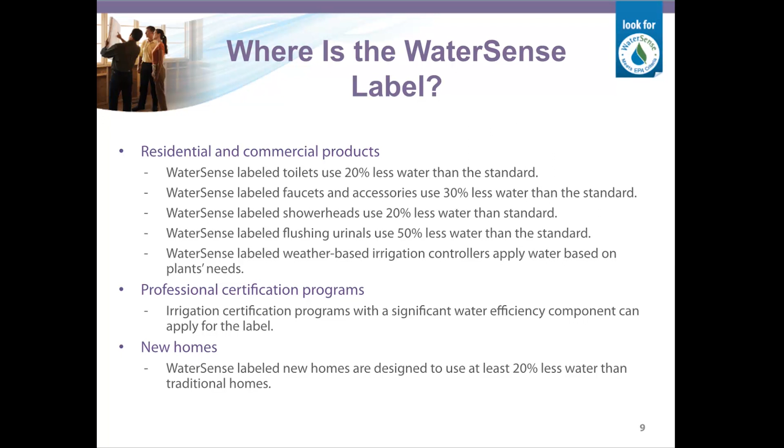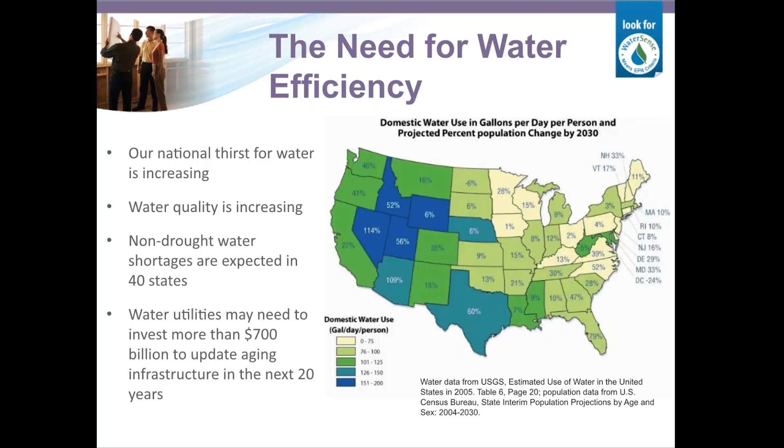As a sense of introduction, I wanted to showcase this map of the country, which essentially shows the population growth expected for 2030. As you see in this key, most of the country is going to be experiencing growth until then, and therefore there'll be more demand on our water system and our infrastructure. Unfortunately, there hasn't been that much investment in our actual infrastructure, and so we know that water efficiency is going to be one of the primary points for many jurisdictions as we move forward. We also expect that many of our states will experience shortages that are non-drought related. So installing, building, and designing homes to be water efficient is a proactive way to minimize the impact of that type of growth.

Another thing we like to do in terms of homes and promoting our program is making the link between energy and water and what that means for efficiency as a whole and sustainability. We really just want the public to understand that it's not just about water. Electricity and energy have a lot to do with how we get our water, where it comes from, the way that it's treated, delivered, and essentially taken off our lots. We like to make that link, especially because we realize that the energy industry is a very important one, and there are a lot of financial resources given to the energy industry that may lack in the water industry. So leveraging that and making that link has become a really important part for us.

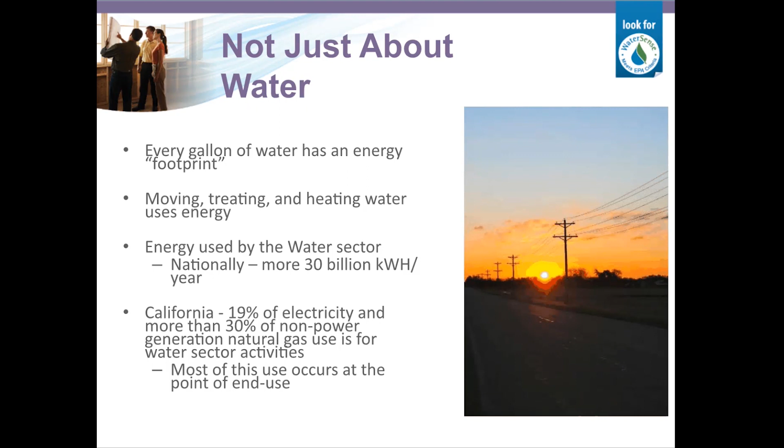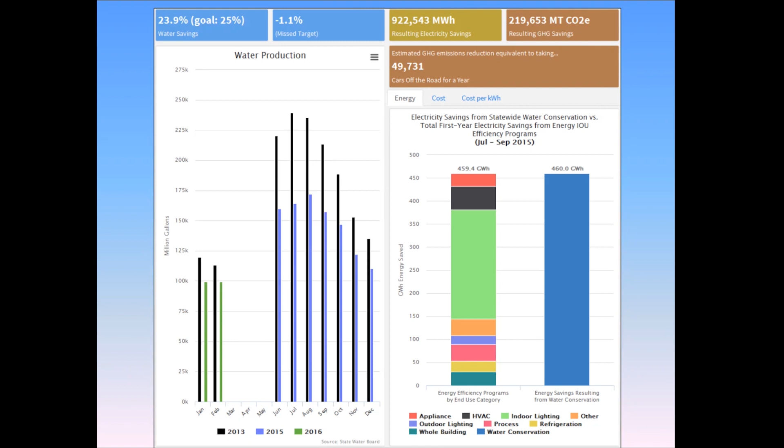And we see building codes in jurisdictions such as California and also in Denver that are adopting some more stringent water efficiency codes, and that have included some of WaterSense's guidelines into their own plumbing code.

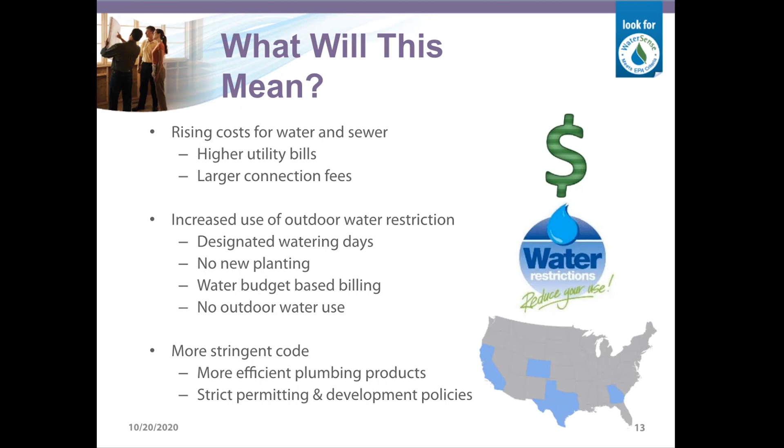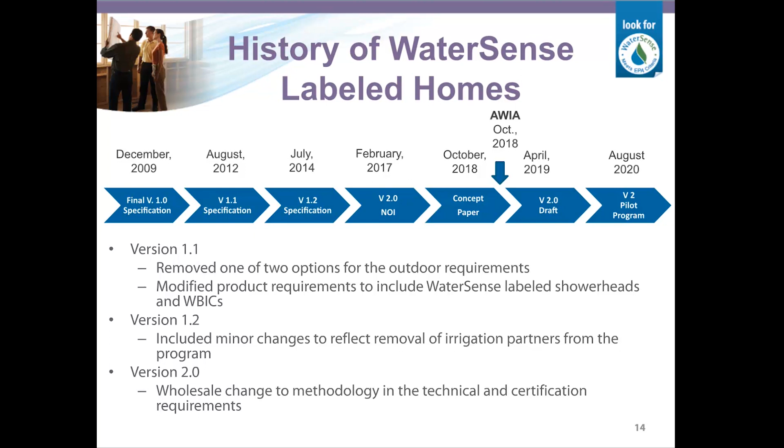And then the final draft of version 2.0 was published in 2019. And just now, as we speak, we are starting to roll out a pilot program of version 2.0, which we'll talk about a little bit towards the end.

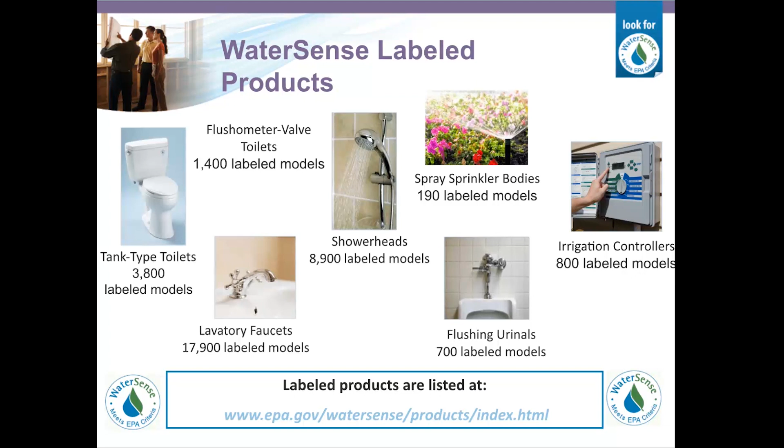Then we move into the WaterSense labeled homes. The criteria for obtaining the label on homes is any single family house or townhouse, and also residential units in multifamily buildings that are 3 stories or less. The caveat with multifamily is that we require that each unit is certified rather than the entire building. So we look at each unit to make sure that each one is meeting each requirement.

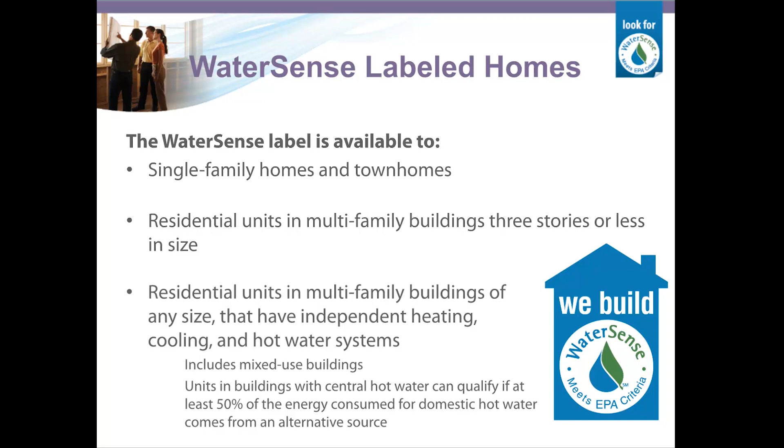So why build WaterSense labeled homes? Well, we found as the program has evolved, starting with products, that it was important to not only offer product solutions at the endpoint or user level, but also to make it a whole house building science approach, looking at how water is distributed through the home and how that distribution system impacts both the performance and life of these products.

Naturally, convenience, efficiency, and confidence that a homeowner who has a WaterSense labeled home is assured that their home is more efficient than the standard, and that they are having an impact on water use. One of the bigger points is outdoor water use, so there are requirements in our certification that provide guidance on the type of irrigation and landscaping used.

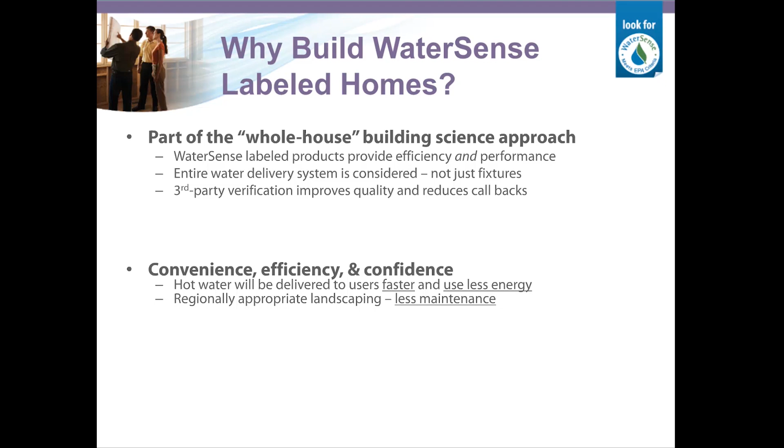And then there's the ability to co-brand with WaterSense. There are other partner or sister programs we have with EPA, or other regional green building products or certification programs. Those tend to align really well with WaterSense requirements, allowing our certification to be seamless when builders are working toward any other green or sustainable certification.

So now we're going to jump into a little more detail about what the requirements are and what that looks like for a home builder.

These are the various components of a WaterSense labeled home. We start with WaterSense labeled products, which are required in every home certified by WaterSense. That's because these products have already gone through testing and certification, so we're sure that by just installing WaterSense labeled products, we know they're going to perform well and be at least 20% more efficient than any standard product.

Then we look at hot water distribution. One of our requirements is that hot water is delivered to the tap in a more efficient and timely fashion than in a standard home. We have requirements for timing and the amount of water that can be flushed out before you see a 10-degree temperature difference.

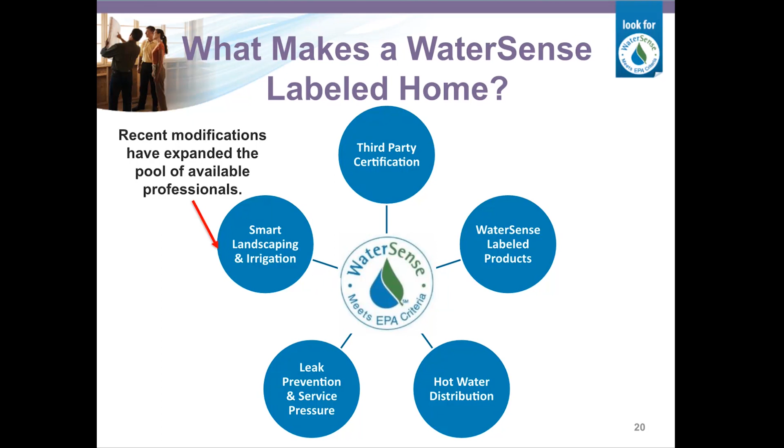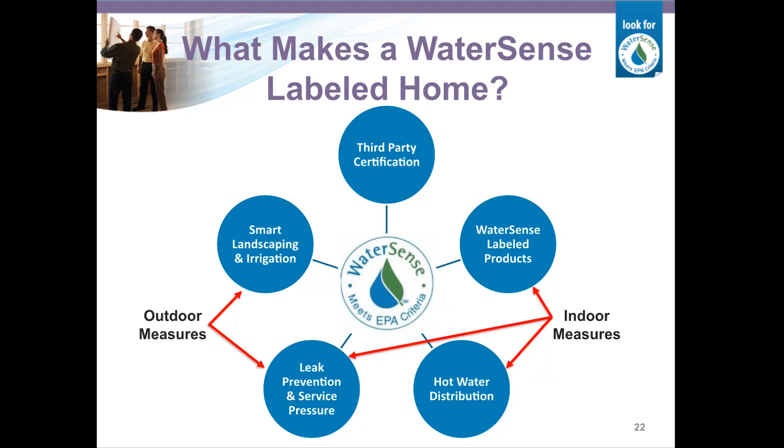So we've had some modifications to our outdoor requirements, which we'll discuss in more detail. These three components make up most of our indoor requirements, and leak and service pressure obviously also affect the outdoors as well as landscaping. And of course, we always work together with our sister programs, Energy Star, also under EPA, as well as the folks at Indoor Air Plus, also at EPA.

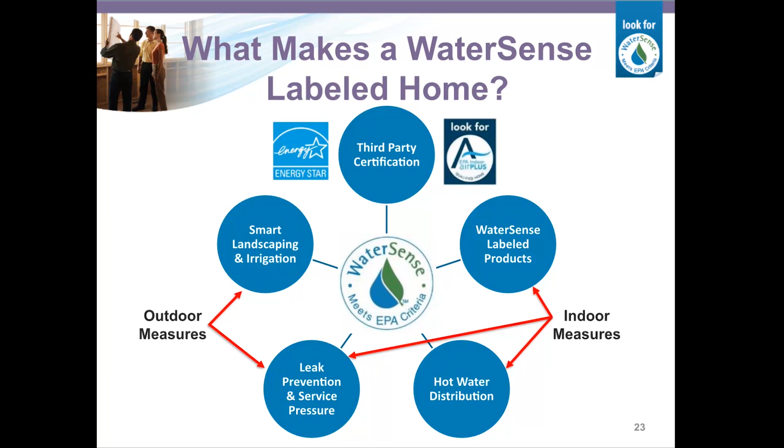So this is what our checklist looks like, and I apologize if it's not very readable. You can always go to our website, and I'll make a note of providing a link in the chat here at the end. This is essentially a step by step of all the requirements for certification.

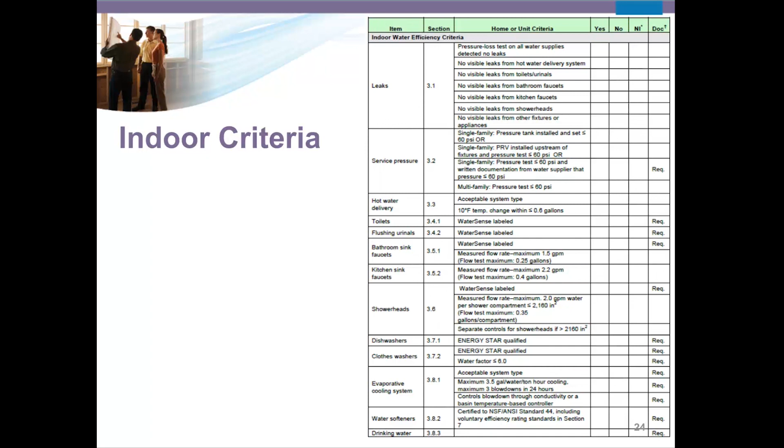Some of the simple things we're going to look at, what we call air quotes low-hanging fruit: leaks. If we're dealing with new construction, these should be relatively simple to identify. So we expect to see no leaks and no loss in pressure throughout the home.

Other low-hanging fruit are WaterSense labeled products: toilets, faucets, shower heads, all should be WaterSense labeled, as well as any irrigation systems that may be installed. And then, of course, dishwashers and clothes washers that are Energy Star certified and meet the water factor requirements, which we'll go into more detail on.

So those are all relatively easy. These are things that can be bought right off the shelf and installed, and there really is no more effort needed into complying with these.

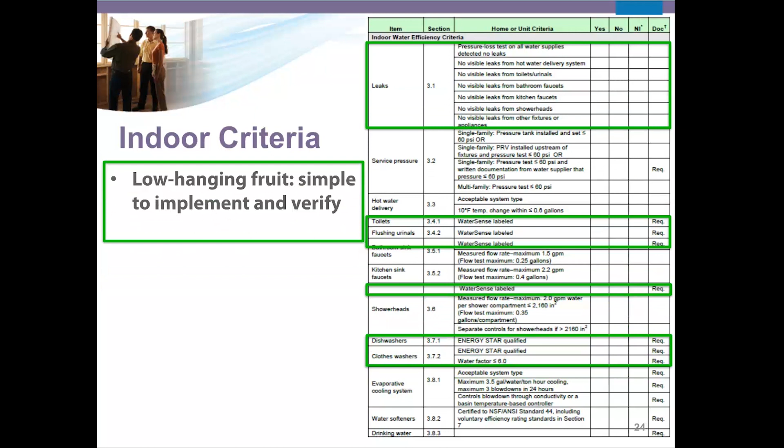Then we have items that perhaps require a little bit more effort in terms of documentation or verification. So our service pressure, the fact that you have to go out there and look at the water line and take a gauge to it, and just verify that the pressure is not anything higher than 60 psi.

Then in terms of the products, we do ask that you provide documentation of the models that have been installed and just verification that they are WaterSense labeled. A lot of the time we find that verifiers come across the fact that documentation or manuals have not been saved.

So you can always go to our website to confirm whether a model has been labeled. If it's not on our website, which is not updated live but rather every 3 months or so, you can always email us directly and we can certainly verify that for you. And then systems that are a little bit more complex, such as evaporative systems, water softeners, or drinking water systems, can also require a little bit more.

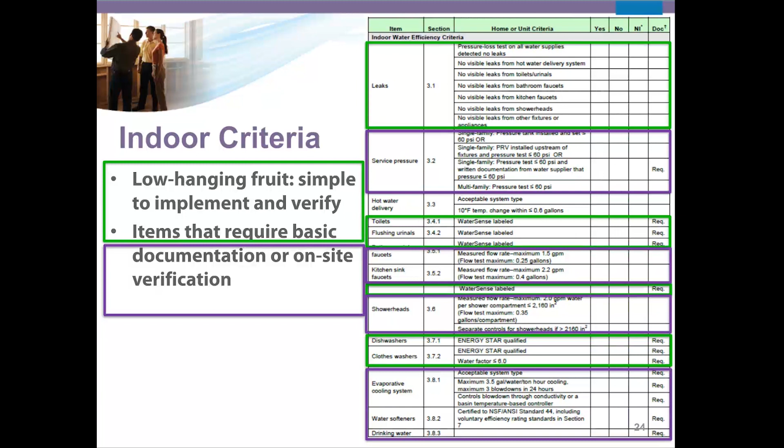Okay, and then this third one is our hot water delivery system. This one tends to be a little bit more challenging, given the nature of and the need for it to be designed and also built to spec, and requires a little bit more inclusion of different teams, as well as the plumbing technicians to be on board.

So this one can get a little bit tricky, but we have found that builders who start to get acquainted with the program, after their first few homes, and if they really bring their plumbing staff and their plumbing subcontractors on board, it could be something that is very successful and can really have a great impact on the home.

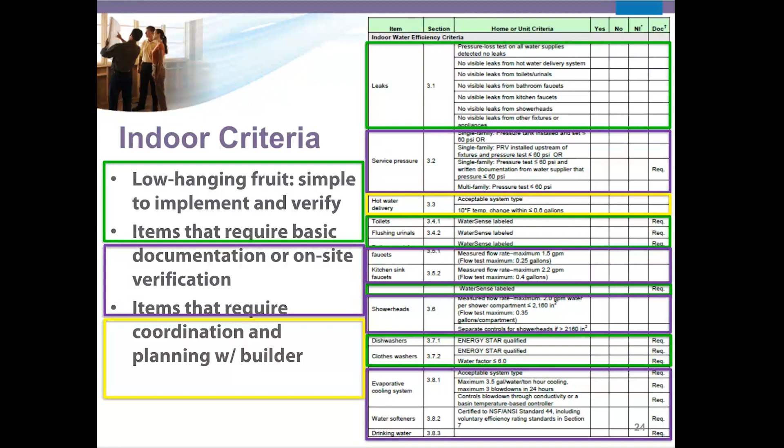Okay, so we've talked a little bit more about this. I won't go into detail because I know we're probably running a little bit out of time, and I did want to get a little bit into version 2.0. So again, this is just low-hanging fruit, a little bit more detail on how that's acquired.

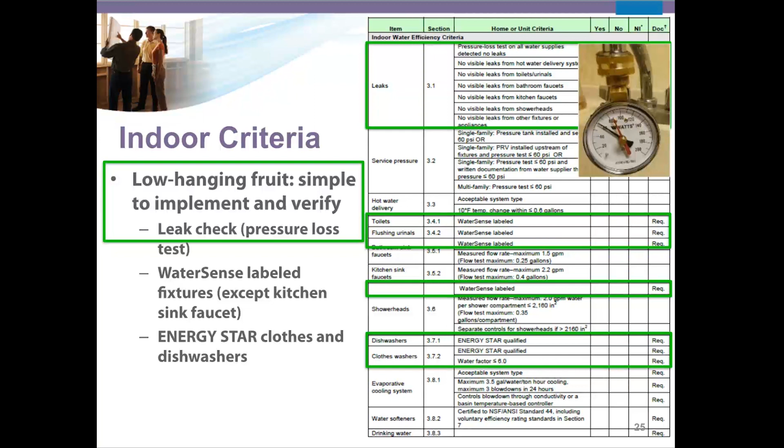I had mentioned the water factor earlier, and that was in regards to any appliances that are Energy Star certified. So what we're looking for is essentially at what ratio the water factor shows the ratio of gallons per cycle being used versus the cubic feet, or the volume, of the appliance itself.

So if you look at this example, if a clothes washer uses 30 gallons per cycle and has a tub volume of 3.0 cubic feet, then the water factor is 10. We set these water factors essentially because they are significant as to how much water the appliance is saving.

So even though these appliances are not WaterSense labeled, there is a measure in order for them to be energy efficient, they also have to be water efficient in order to achieve that. So that's why we look at the water factor.

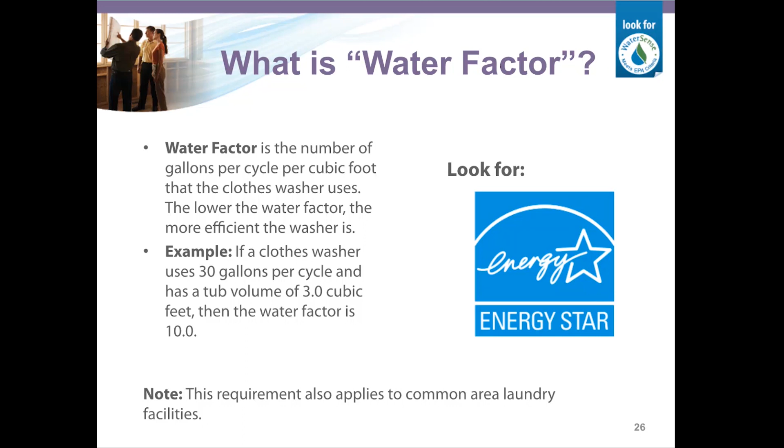Again, these are the items that require some on-site verification. So we had talked about the service pressure and measuring flow rates. Despite any faucets and shower heads being certified, we do ask for a flow rate test, where you essentially place a bucket or bag labeled to a specific volume and time it, making sure the time it takes to fill that volume is in line with our requirements. And then system documentation if any of these other systems are installed, like evaporative cooling systems, water softeners, and drinking water treatment systems.

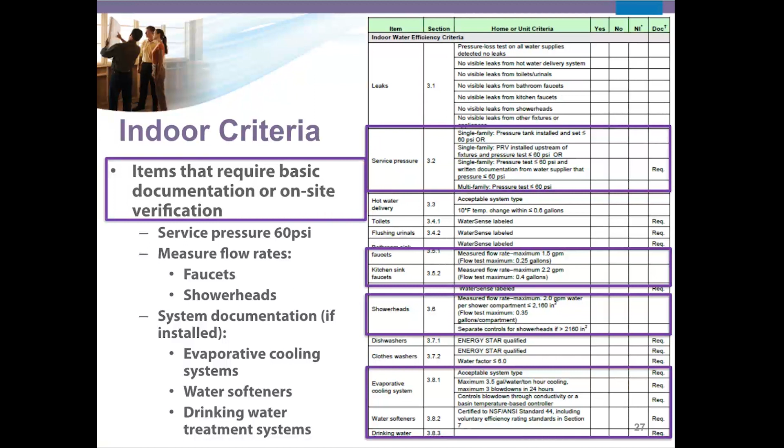Like we talked about earlier, the hot water delivery system has to be well coordinated and planned with the builder. Looking at the different types of water distribution systems, deciding which is best, which type of plumbing lines would be used, and how the system is designed in its layout. The hot water system is a big one in terms of water savings, so homeowners aren't wasting water waiting for hot water, but also for energy, because the amount of water heated is decreased and naturally not wasted.

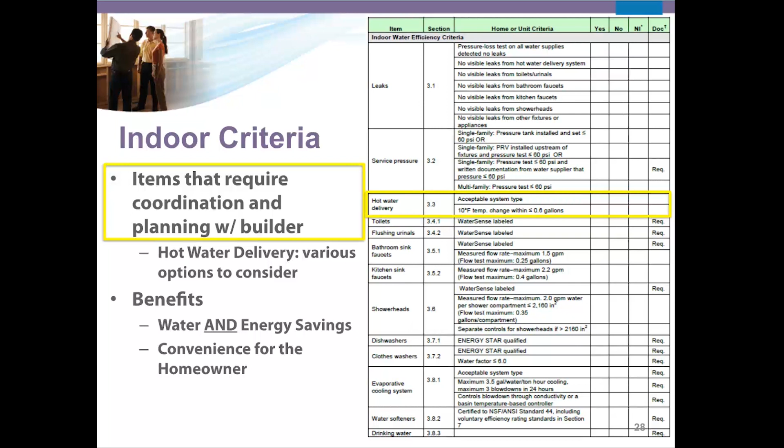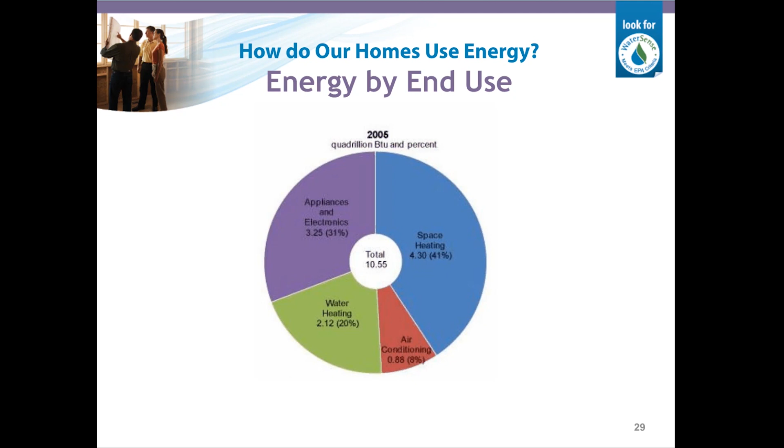Jumping back a little into energy and how we're tying it to water, here's a pie chart of how we're using energy in the home. We're at 41% for space heating, 8% air conditioning, 20% for water heating, and about 31% for appliances. This is actually a really cool comparison.

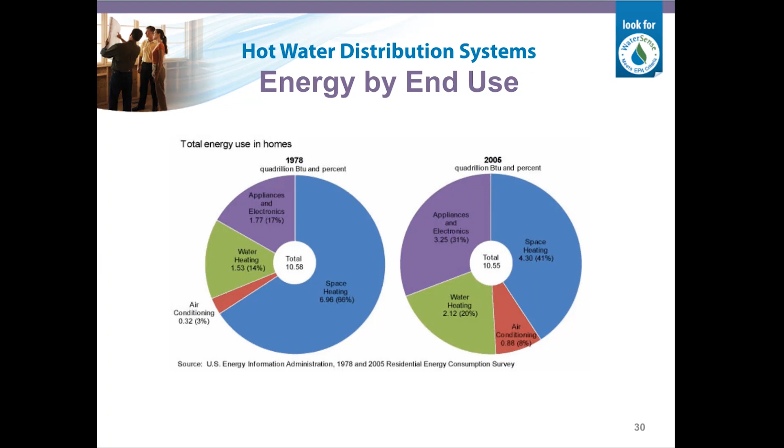Air conditioning has increased, obviously, because we just use more air conditioning than before. But when we look at water heating, we see that it's actually increased. So why haven't we made that much progress there? Why has that increased instead of decreased? One thing we start to look at is what has happened, or how have our hot water distribution systems...

Developed? So essentially just a basic distribution system: we have our water heater, a main trunk, and then some branches coming out to our fixtures.

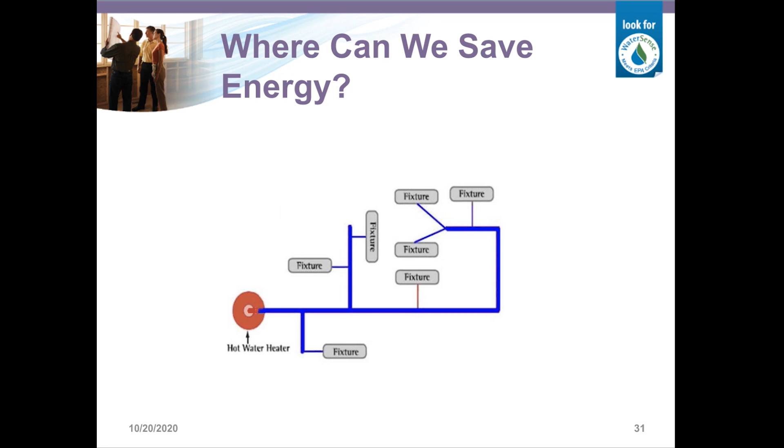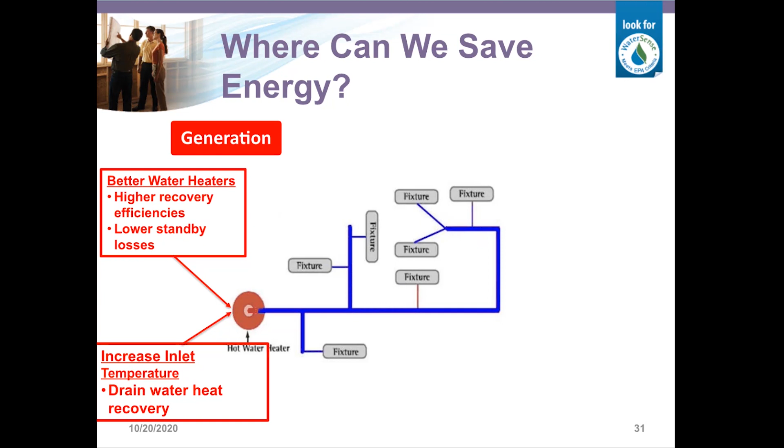We do have better water heaters, and in some ways more efficient materials. Then we move into the distribution, which has also improved to some extent. And the use—how have we changed the use? WaterSense labeled products are one thing we like to highlight, along with more efficient products and user conservation—just some mindfulness from the end user in the way we use water.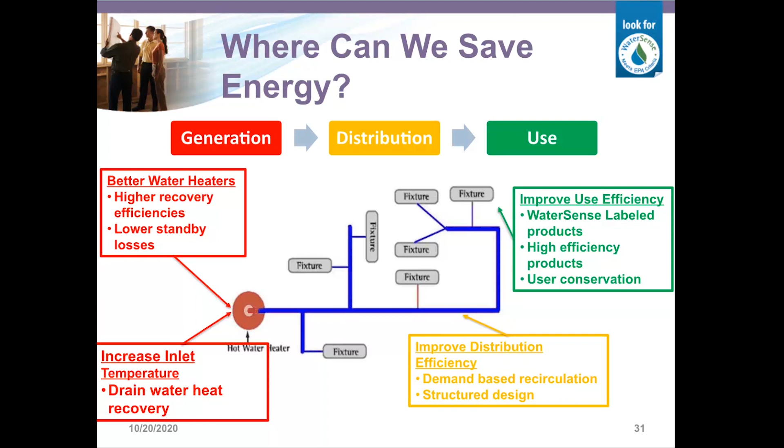Some of these are also components looked into by the HERS index, which is the energy index. We like to highlight the fact that the energy folks are also looking into how some aspects of the hot water distribution system are behaving in terms of energy.

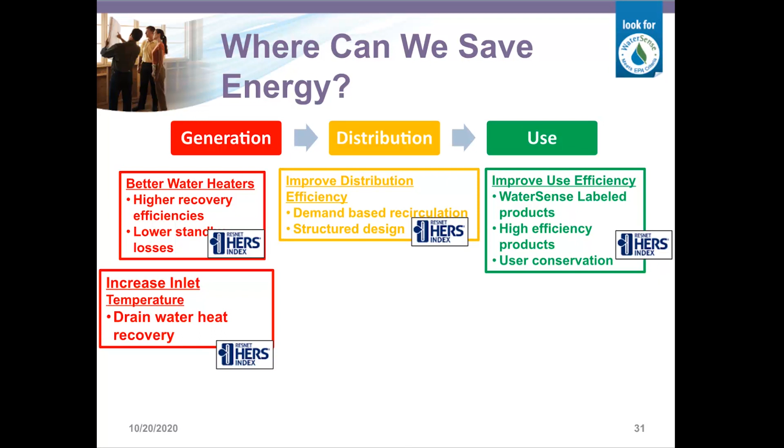So we look at the system, which is pretty basic. Here we just want to highlight what the problem has been and why we haven't made much progress. We see 1.67 gallons wasted, 20 seconds wait time, in a relatively small home with a pretty classic distribution system.

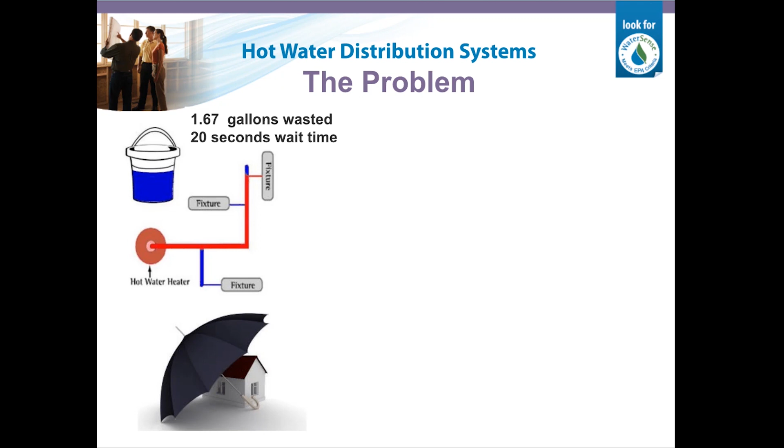But what have we done? All we've really done is taken this old system and basically stretched it out into our new home so that we get water everywhere we need it. But that doesn't mean it's more efficient—it just means it's an older system that has been expanded.

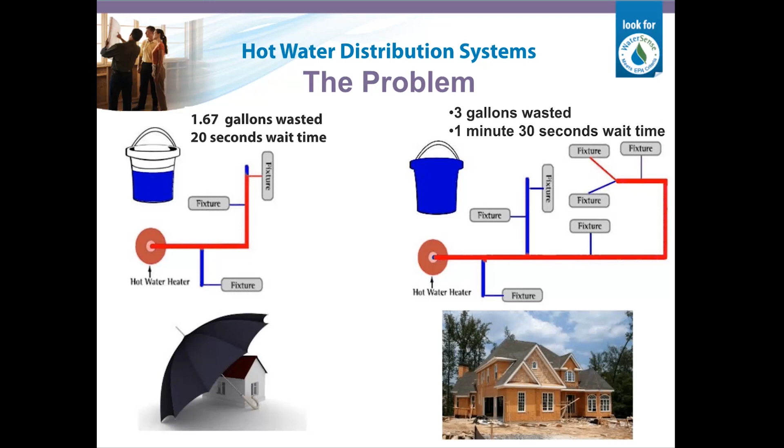So how can we possibly expect, despite any more efficient fixtures or other additional components, for the system to be more efficient if we really haven't changed the layout of the system at all? We haven't rethought how it's being designed. That's one of the big components under version 1.2—looking at hot water and how it's going to be installed within the home. Our requirement reads that the system should not store more than half a gallon of water between the hot water source and any hot water fixture.

And so the way that we test this is that we have to see at least a 10-degree temperature rise before we have 0.6 gallons of water out. So this is the test that I was talking about, where we essentially place a bucket under the faucet or the shower head, and along with a thermometer, we measure the amount of water that is being discharged, and how long it takes for this temperature change to happen.

In recirculation systems, they must be demand initiated. So a push button or motion sensor is what's required.

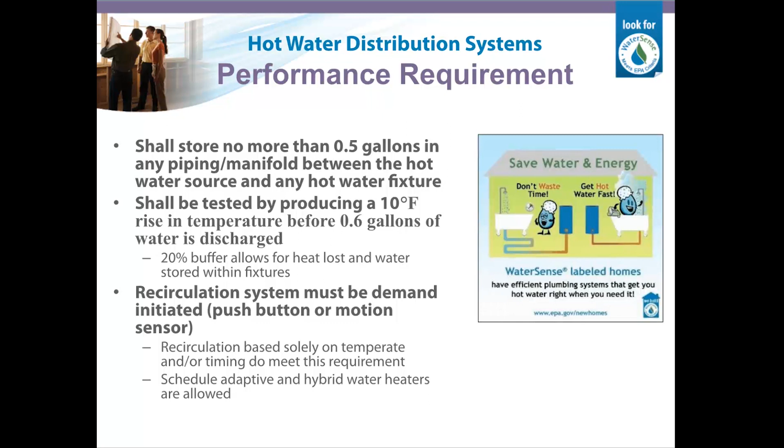Another tool that we offer in terms of hot water distribution systems is this plumbing tool, where you can come in and essentially tell the system details about the trunk, the branch, the twigs, and this will help you in the sizing of your system, making it more efficient.

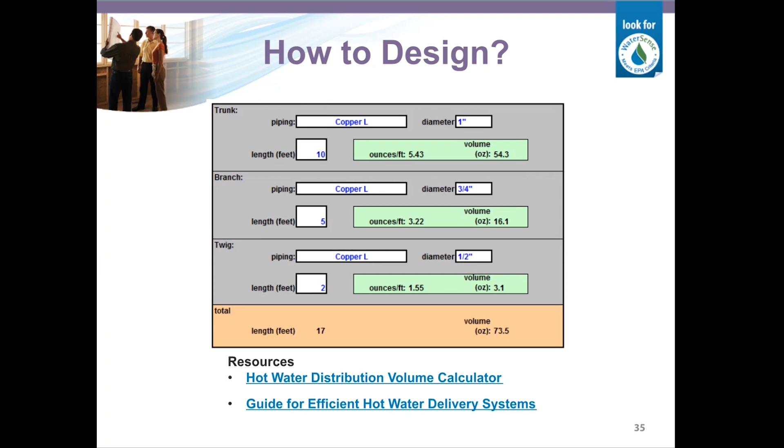We do find that the plumbing fixtures that are WaterSense labeled are more efficient. Despite their efficiency out of the box, they are more efficient when they are installed with systems that are more modern and appropriate, and have the correct piping sizing.

And now moving on to the outdoors. So for the outdoors, we do want to allow for flexibility of plant types and aesthetical appearances, but there are restrictions in terms of the type of planting, mulching that's required, as well as the requirement for an irrigation professional to come and certify the system, and then, if there are irrigation systems installed, the type of irrigation system and how that's behaving.

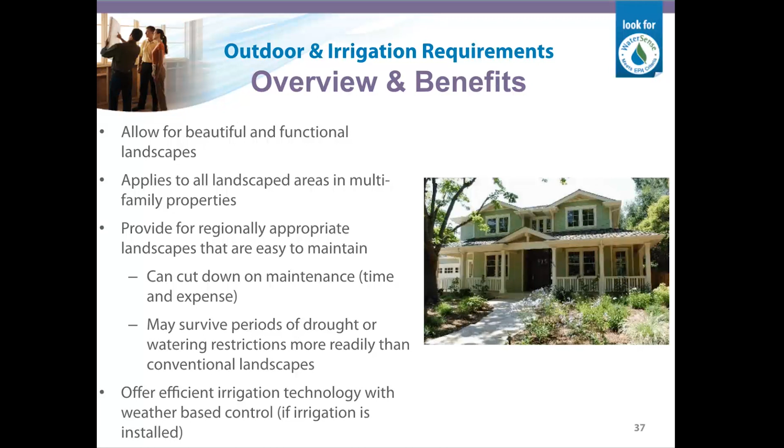Some of the easier or low-hanging fruit items in our outdoor requirements are the slopes of the landscape and mulching, which is relatively simple. Pools and spas, we do require that they have pool covers, and any ornamental or decorative systems, we do require that they have some sort of function—whether that's recirculating water, but also that they either house some wildlife or have some other secondary benefit.

Items that require some documentation would be our irrigation system, with coordination with an irrigation professional. So this is where the irrigation professionals come into play, and we ask that they design and verify the irrigation system and also the landscaping.

So here in a few slides, we're going to show you the water budget tool. That's one tool that the irrigation professionals will use to verify that the landscaping has been installed and built in accordance with what was designed.

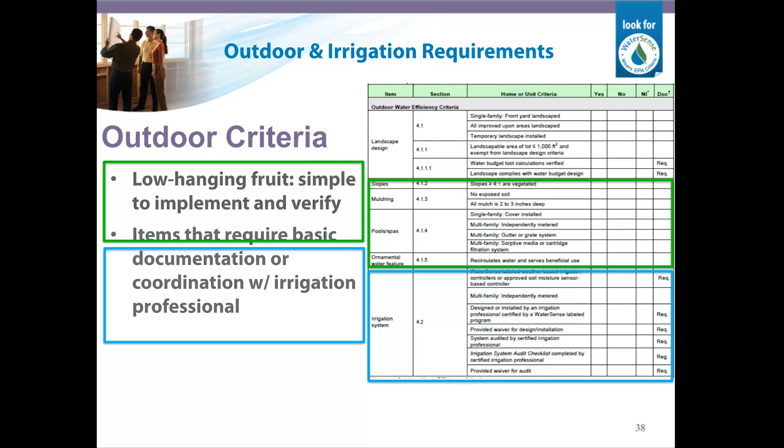Outdoor irrigation requirements. So, though I have been speaking a lot about irrigation systems, it is actually not required. Systems have to be designed or installed by a certified irrigation professional. The system has to be audited by a certified irrigation professional. And if there is an irrigation system installed, then a weather-based irrigation controller should be WaterSense labeled.

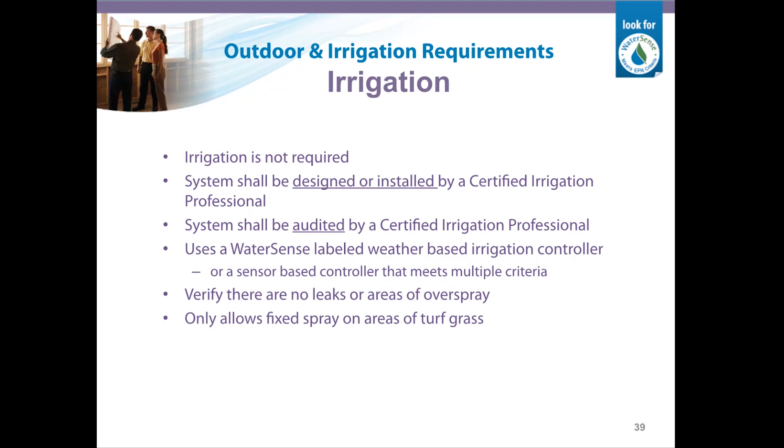Verify that there are no leaks. So again, this goes along the lines with the leaks that we had mentioned for the indoors as well, and then it only allows fixed spray areas on turf grass. So that's another restriction.

For identifying irrigation professionals, we do have a database where irrigation professionals that have been certified through our PCO programs are listed on our website. Folks can come in here to identify any professionals in their area, and you can do it through zip code, based on a distance radius.

And then you have different options of the type of certification that you would be needing, the type of project that you're working on, and then, of course, available for hire or not. Some of the folks that may be listed here that are not available for hire could be folks that have been certified, but perhaps work for a jurisdiction. The way that we have seen that pan out is that folks may reach out to them more for reference or just to bounce off or clarify some requirement questions.

So the water budget tool, which I had mentioned earlier, is a pass-fail measure of whether the home's landscape meets the requirement or not. It's also a pretty simple way to measure the efficiency of the landscape. It helps builders consider which landscape and which type of irrigation design would fit best to their project, and it really rewards decisions that will translate to measurable water savings for the homeowners.

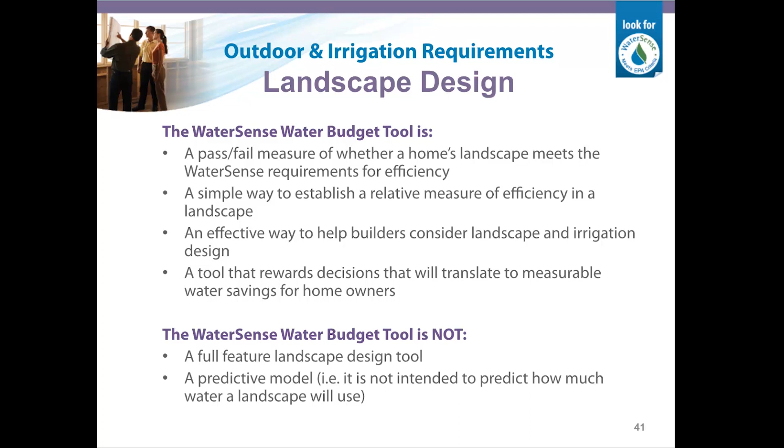These are screenshots of the water budget tool. This is actually a caveat - this is what it used to look like, sort of a parenthesis here in the presentation. We used to have this interface on our website. Unfortunately, the platform it was based on has been outdated and was not repurchased by the agency, so we no longer house the tool in this format. But we do have an Excel sheet that was essentially what was in the background of this tool, so you can still run the same calculations. It just doesn't look this pretty, let's say.

But essentially what you do is come in here and tell it what you're using the tool for, whether it's a development with various landscapes or just a single site, whether you're going to have an irrigation system or not, and the location where the project is going to be done. This is essentially to pull up all the ET and rainfall data, and of course the square footage.

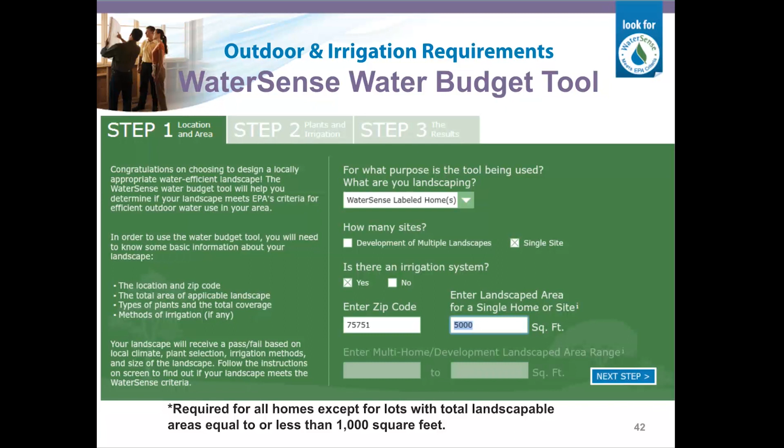Once it takes you to step 2, it's going to ask you to break down that landscape area. The total square footage should add up to the total number you entered in the front. Then you have the opportunity to break it down by typology - whether you're going to have turf grass, ground covers, trees, or shrubs. You'll tell it what type of water demand each of those typologies would have, and then what type of irrigation would be covering that area.

Right here at the bottom, the tool will tell you if you've reached your max or if you still haven't accounted for part of your area. Then it will provide you with a water allowance, in gallons per month, versus a total water requirement for the site, also in gallons per month, and the amount that would be allowed. So in this case, we see that this site is using less water than is actually being allowed.

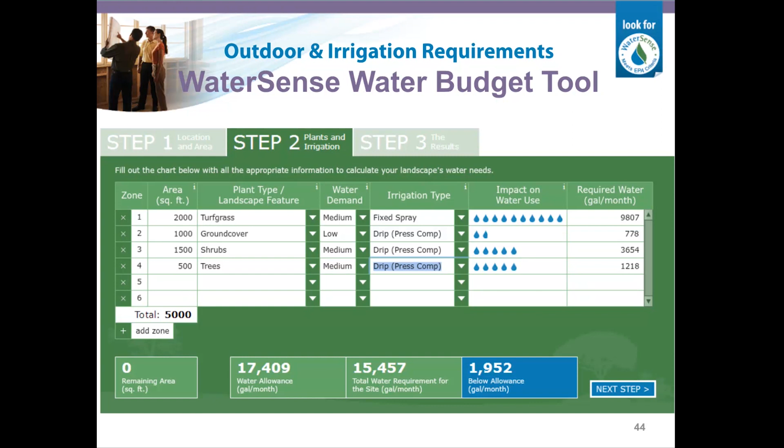And then this is just a screenshot of completing it - in the previous example we only had accounted for 3,000 square feet, and here we have 5,000, so this is showing up as a 0. And finally, we see that that 1,900 gallons is still under what we would be allowed.

So if you're under or right at the allowance, it takes you to step 3, where it tells you that you have passed the requirement and your landscape can be designed in the way that you have provided the input. This is essentially the report that you would provide your irrigation professional for them to confirm that the landscape has indeed been designed and installed in the manner that has been input into the tool.

So then, to finalize our requirements for version 1.2, we do have a component for homeowner or building management education. We essentially ask that there's paperwork and a trail so that homeowners and building managers know what has been installed in the building, how to manage it, operate it, and maintain it. There's enough evidence that no matter how well some of these efficient homes, both in energy and water, are built and designed, if they are not sustained long-term, the impact is very minimal. So this is another requirement in our certification.

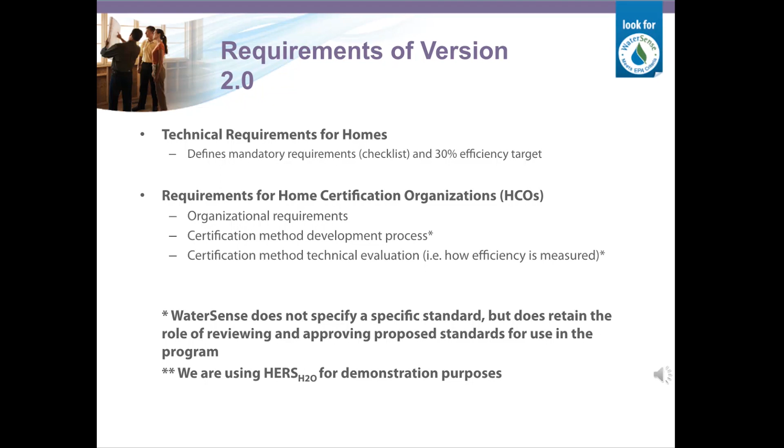This new version has this component of HCOs, which means we work through the home certification organizations to label the homes. So here is the checklist - as you see, it's not even one page. It's just very, very simple, a much more simplified version of our 1.2 checklist.

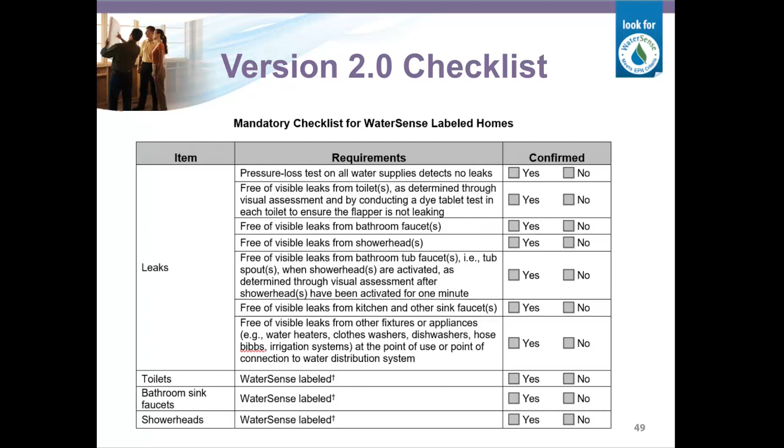Essentially, leaks are a big component - no leaks throughout the home, both indoors and outdoors - and that all the fixtures installed indoors are WaterSense labeled. The big question we've gotten with 2.0 is, why aren't we looking at outdoors? The short answer is that homes will not be able to achieve that 30% efficiency target if they don't target the outdoors.

What we are allowing here is that home builders can now decide on their own where they need to save the most water. If you are in a region that is arid and dry, then your highest water use is probably outdoors, and so that's where you would focus. But if you're in the Northeast, where the tables turn, then you can focus your water efficiency indoors.

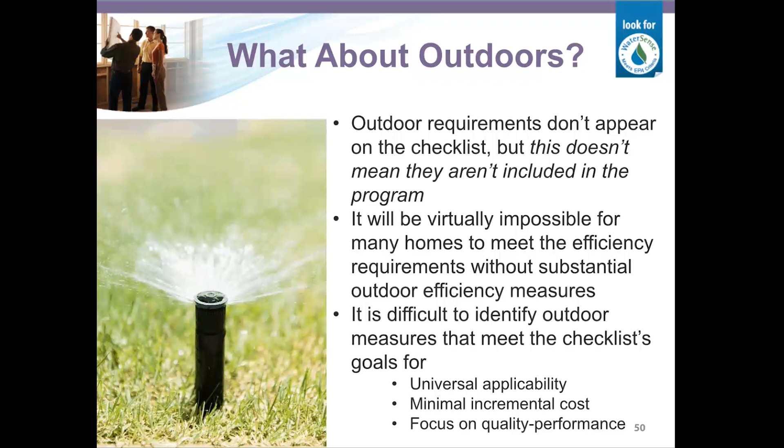It's the same thing with hot water distribution. While we continue to promote and highlight how efficient hot water delivery systems can be, and this is a big component that would help you achieve that 30% efficiency target we are requiring, it is no longer mandated that people design in this manner. What we are finding, though, is that systems like HERS H2O have adopted some of these practices into their efficiency standards. So even though WaterSense is not requiring it, we see that programs are moving towards that goal.

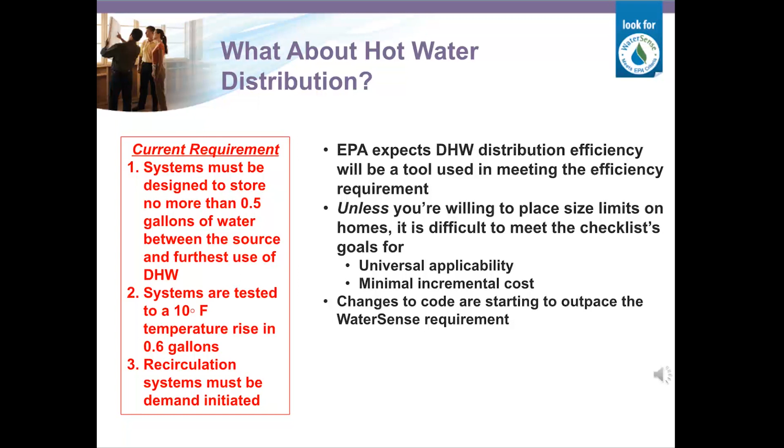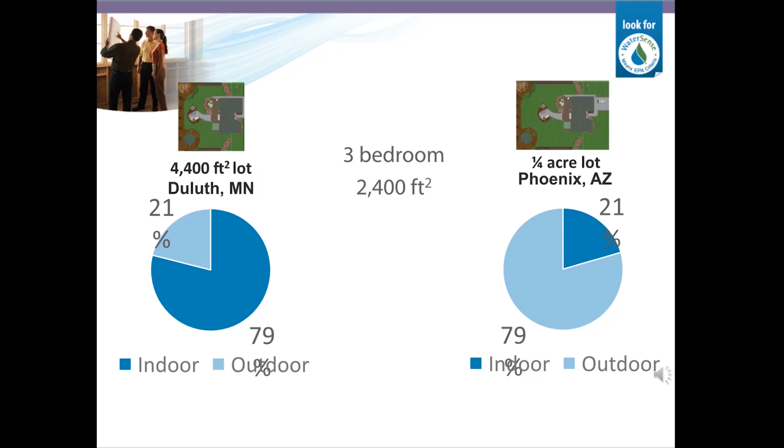So what this means for the building industry is that the hot water distribution requirement is no longer a mandate. We don't have to use the WaterSense budget tool, which is still available and can be used as a reference tool, but it's not mandatory. There's no longer a mandate for irrigation professionals either - again, that's something that would fall onto the HCOs if they want to require it. And the providership is no longer required as well, which is part of our current certification structure.

This is an example. We wanted to present an example of some of the questions we've gotten in terms of version 2.0 as well. What happens to states like California or Denver who have already adopted plumbing codes that make them more efficient than the rest of the country?

So we wanted to run a scenario where we are trying to certify a home under version 2.0, which requires a 30% efficiency rate. We have a home in California, a pretty typical home, 10,000 square feet, EPAct level plumbing products, which are standard DOE standard level appliances, and typical landscape. This type of home usually uses 165,000 gallons per year.

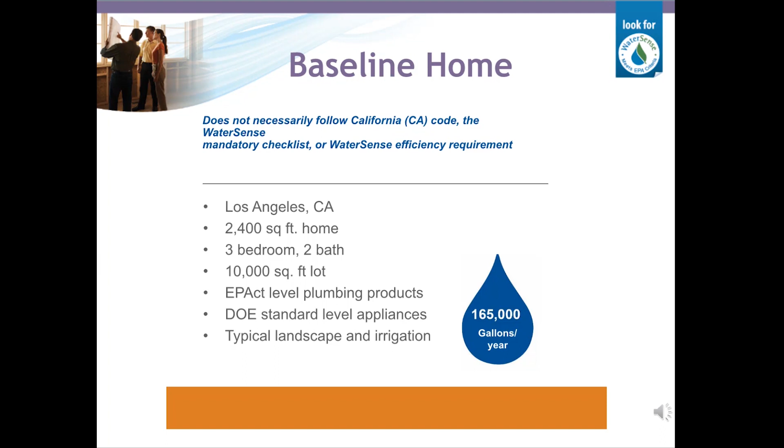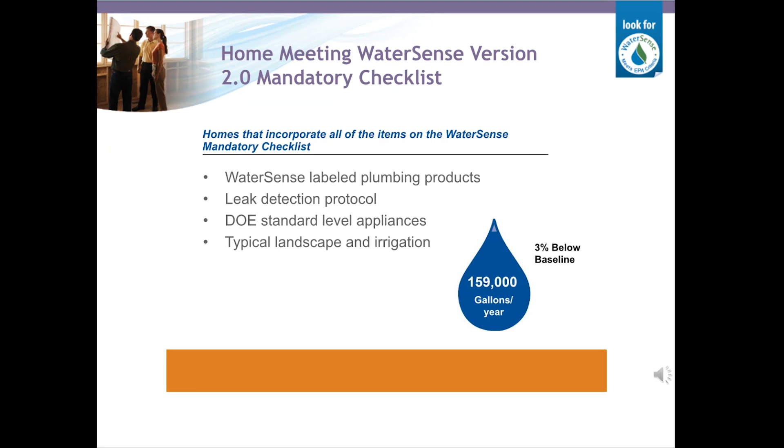If we start to add protocols to make it more efficient, we see that if we do leak detection, it goes a little bit under the 165, so now we're saving 3%. We take that same home and apply the California compliant appliances and California minimum requirements for landscaping irrigation, and that takes us down to 139, but that's only 16% below the required 30% efficiency.

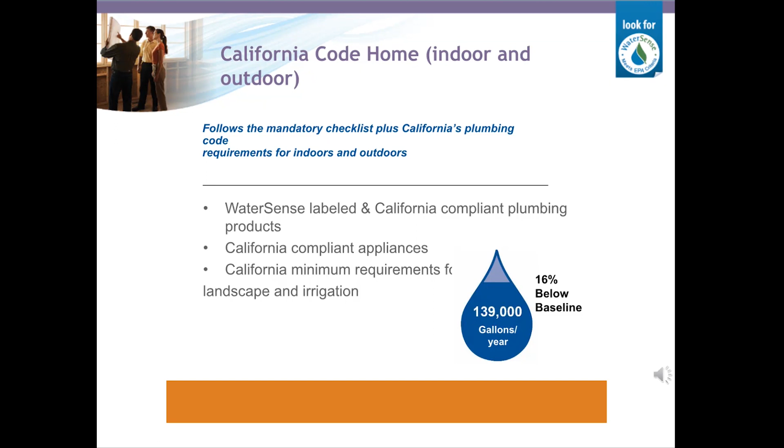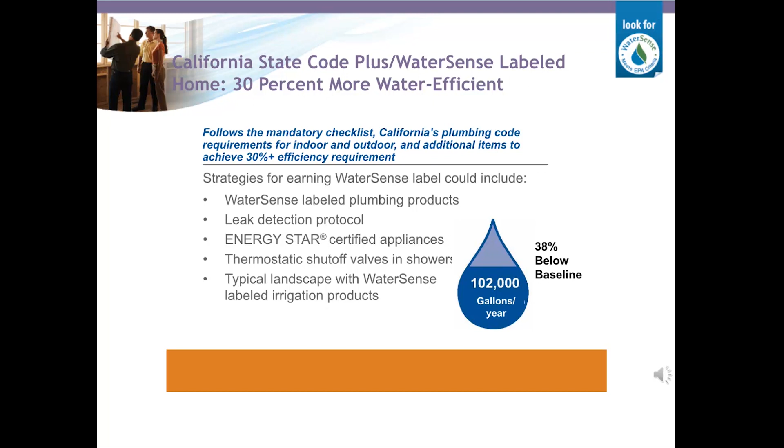So it's not until we really push the envelope and install the WaterSense plumbing products, along with the leak detection and Energy Star appliances, and some other water efficient features that we start to achieve that 30%. So the purpose of this example is to showcase that even in states like California, like Denver, where plumbing codes are a little more stringent, they're still not achieving that 30%, meaning the WaterSense program would still be very much relevant, even in those states that tend to be more efficient.

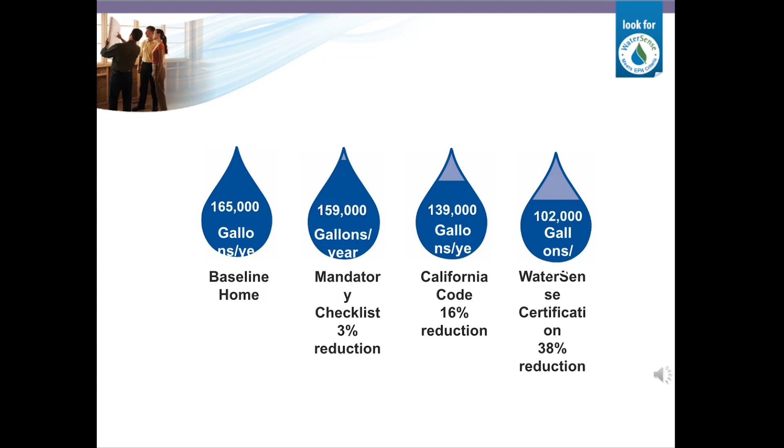Here are some marketing tools that we wanted to showcase for builders who are acquainted with our program and that want to promote more water efficiency in their projects.

We did want to highlight, for those folks that work in multifamily buildings that are 4 stories or higher, there is a water score feature that is managed through Portfolio Manager that we wanted to bring to your attention. Essentially, it's a benchmark from 1 to 100. This is only available for multifamily buildings, and it's used to essentially gauge water - where do buildings, how are your buildings behaving and performing in comparison to other multifamily homes?

One cool thing about this Portfolio Manager feature is that there isn't that much data out there, and so we're able to collect data at this scale of how water is being used in large multifamily settings.

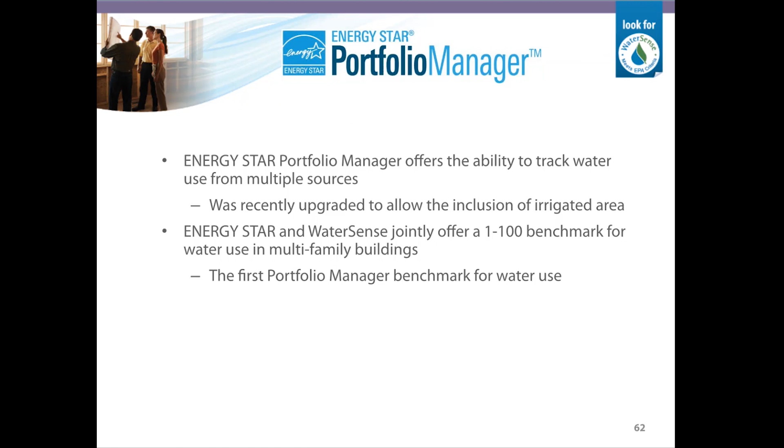You can get more information about this. This is under the Energy Star program, so we're not running it through WaterSense, but you can definitely get more information from their website and more insight into how you can participate in that program. And if you have any of your other buildings that are already in Portfolio Manager, inputting your water data is relatively simple.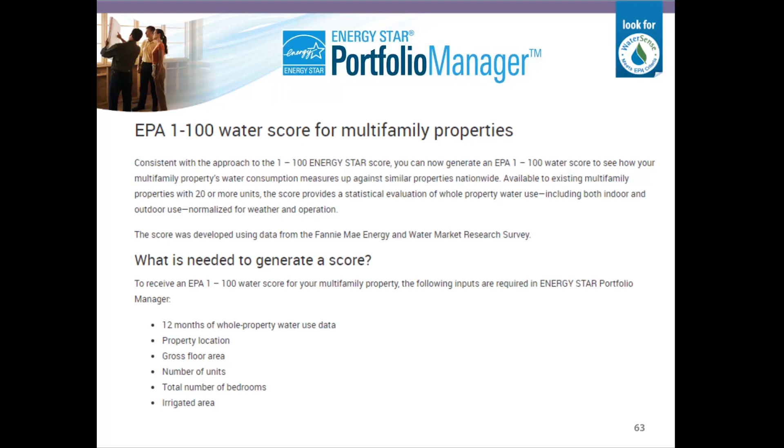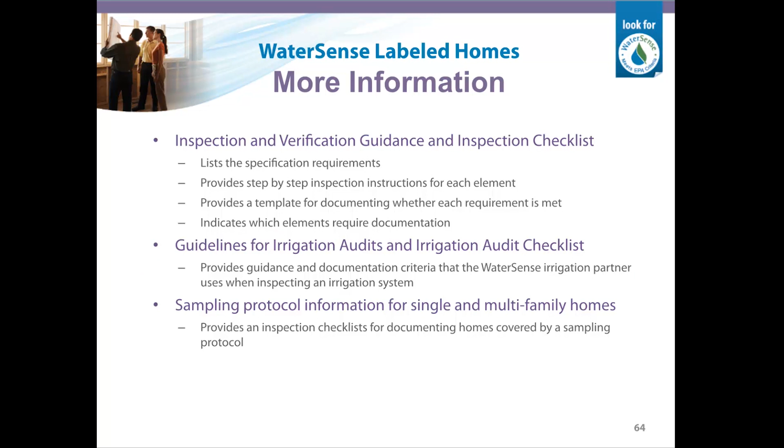If you need more information about our program, inspection and verification guidance and inspection checklist, any guides for irrigation audits or the audit checklist or any sampling protocol, be sure to reach out to us. You can always reach us directly or reach us through HAC. I'm sure they would be more than willing to put us in contact.

And with that, I have ended. So we welcome any questions that anyone may have.